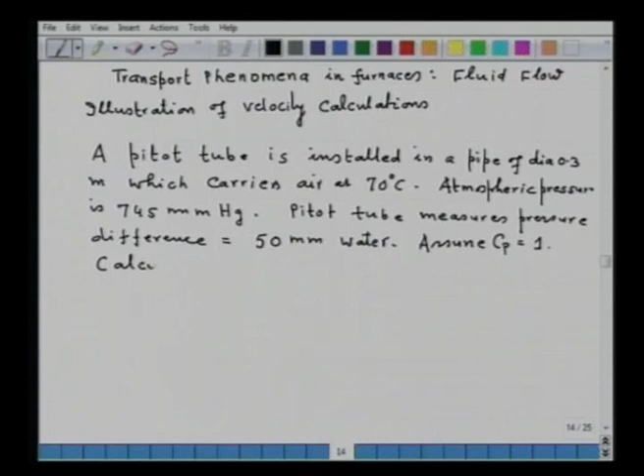Assume pitot tube coefficient, that is Cp, which we have introduced in the formula, is equal to 1. That is, it is a very well designed pitot tube. So you are required to calculate the flow rate of air passing through the pipe.

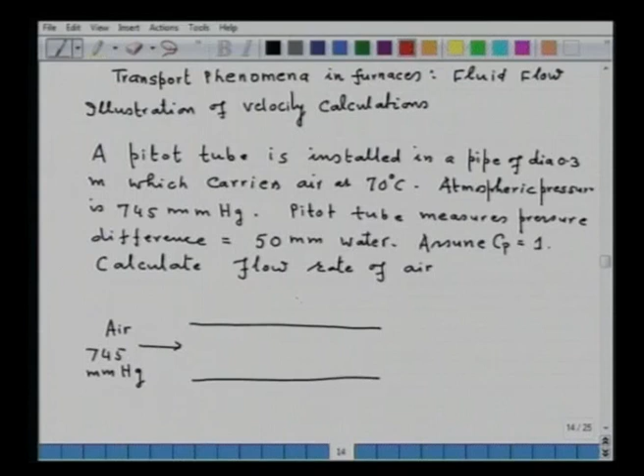Now the problem can be illustrated this way. If this is the pipe, air is flowing, and the atmospheric pressure is 745 millimeter mercury. Here there is a pitot tube placed. This is our pitot tube, placed at the center of the pipe, and it is at this position.

So the pressure difference of 50 millimeter of water, which is measured through the pitot tube, is in fact at this particular point, that is at the center of the airflow. So if the air is flowing this way, this is the flow of air, then this particular streamline will impact the pitot tube, and hence you read the pressure differential. So what pressure we are recording is the pressure at the center of the pipe.

So of course, what we will be determining from this pressure measurement will be the maximum velocity, and from there we have to calculate the flow rate of the air. So this is in fact the problem.

Now some conversion factors are also given: 1 millimeter of mercury is given to be 133.2 Newton per meter square, whereas 1 millimeter water is given as 9.806 Newton per meter square. Now these conversions you may be needing. Also, it is given viscosity of air at this temperature is 20.6 into 10 to the power minus 6 kilogram per meter per second. Now we have to solve this particular problem, and as we know from the pitot tube, that is V maximum equals Cp into square root of 2 into delta P upon rho.

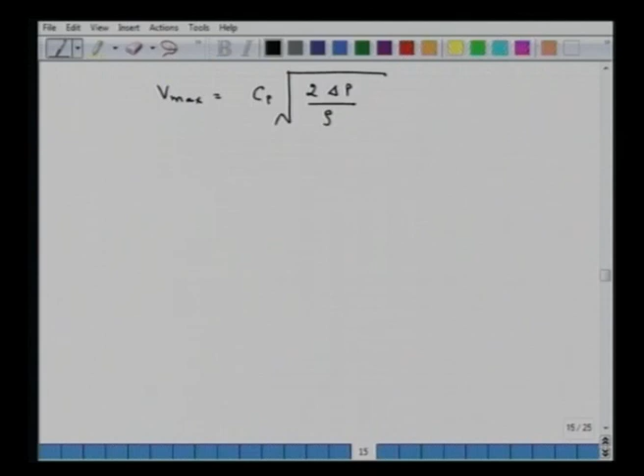So we have to calculate now the V maximum. First we will calculate V maximum, and from V maximum we will calculate the flow rate. So we have to first of all find out the density. So density rho equals P upon RT. P is 745 millimeter, so you have to convert into Newton per meter square, and the value of rho will be 1.01 kilogram per meter cube.

Now we have to convert delta P, which is given in 50 millimeter of water. So 50 into 9.806 Newton per meter square. Just multiply it, that will be 490.3 Newton per meter square.

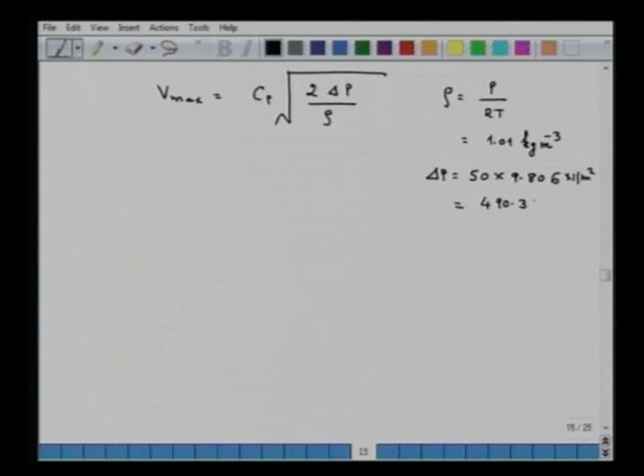Now we know all the variables in this equation. So V maximum equals square root of 2 into 490.3 upon 1.01, so that will give us 31.2 meter per second. So this illustrates how the pitot tube can be used to measure the velocity of air or fluid in the pipe or in the duct. So this is the maximum velocity at which the air is flowing.

Now if we calculate the flow rate, flow rate simply will be equal to rho u into A. So if we do all the substitutions, then we will be getting 2.20 meter cube per second.

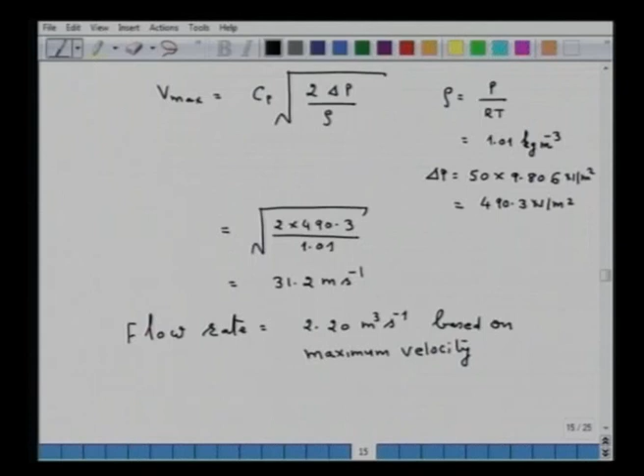Now this is based on maximum velocity. And as you recall, there is a velocity distribution in the pipe. So if you want to calculate the average air flow rate, that means you have to calculate average velocity, and this average velocity may be very close to the actual flow rate of the air rather than the flow rate that we obtained from maximum velocity. So in that particular case, what we have to do?

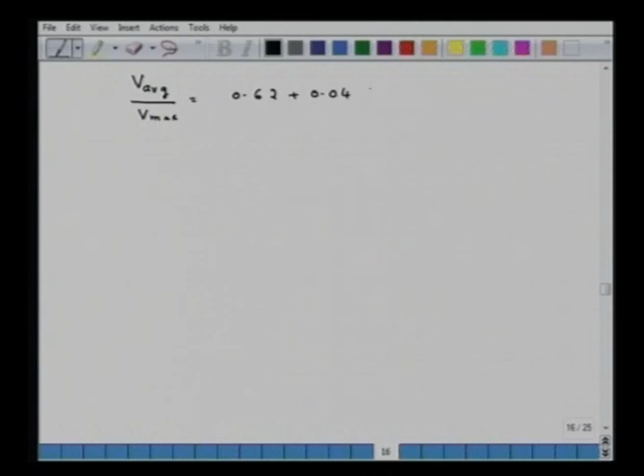We have to utilize this expression: V average upon V maximum equals 0.62 plus 0.04 log of d V maximum into rho upon mu. We know all these variables, so we can substitute and find out, and this value will come out to equal 0.83, and hence V average will equal 25.9 meter per second.

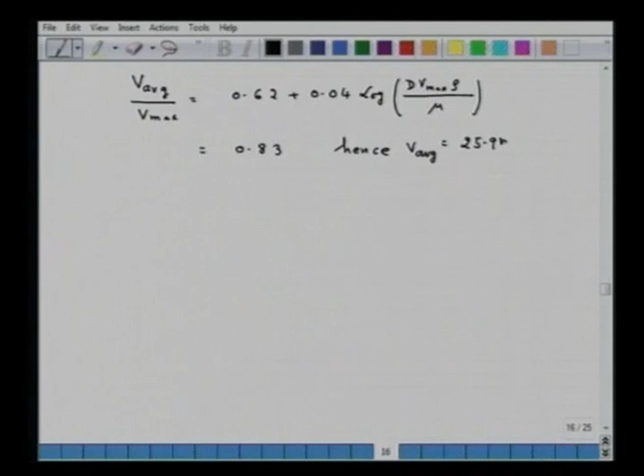Now we can determine the flow rate. The flow rate comes out to be equal to 1.83 meter cube per second, which is based on V average. So that is the difference between the flow rate when maximum velocity and average velocity are used.

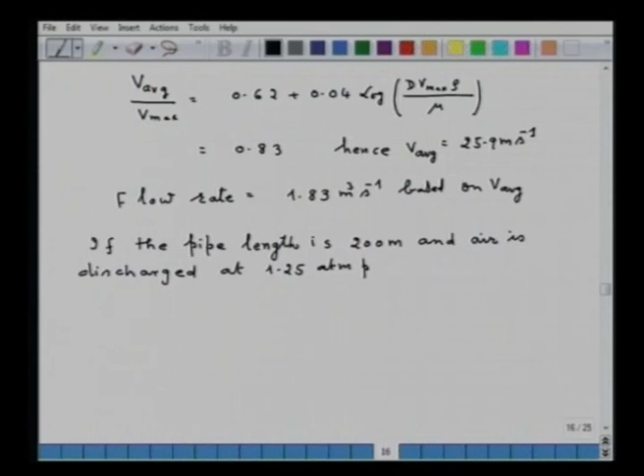Now if I want to extend this particular problem further, let us say if the pipe length is 200 meter and air is discharged at 1.25 atmosphere pressure, then calculate the power of the fan required to draw air from rest.

Atmospheric pressure is same as earlier. Atmospheric pressure is 745 millimeter mercury, that is what is given earlier.

Now, since the pipe length is involved and air is entering from rest and it is discharged at 1.25 atmospheric pressure, we have to calculate the power of the fan.

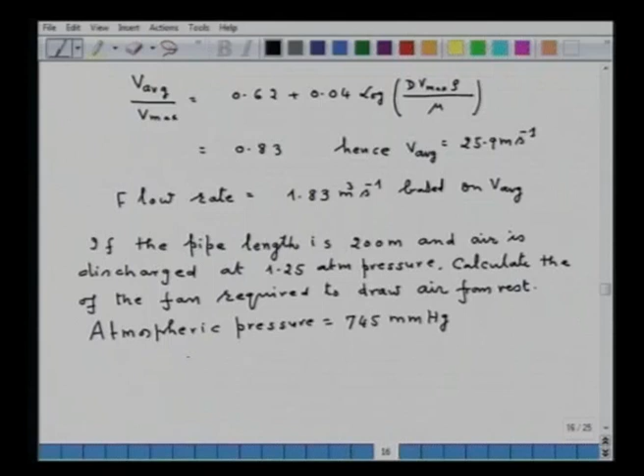If I represent again through a diagram, then it looks something like this. This is the pipe whose length is given as 200 meter. Air is drawn from rest, so somewhere here air is entering. Somewhere here I require to have a fan, of which I have to calculate the horsepower, and now I am taking the air is discharged, say at 1.25 atmosphere, which is given.

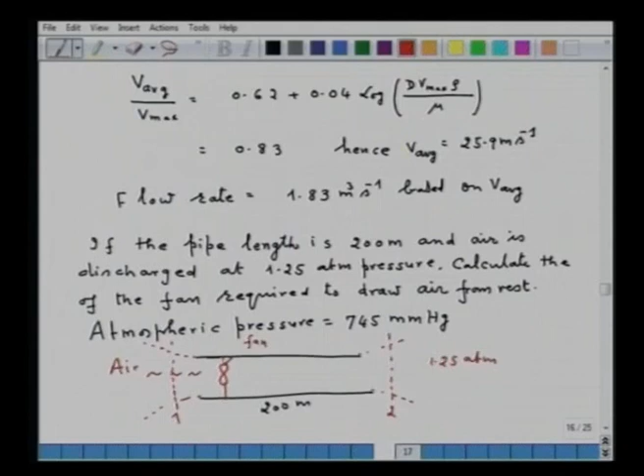So now if I want to solve this problem, what I have to do? I have to first of all take this as my section 1 and this is my plane 2. Naturally, I have to do the mechanical energy balance in order to solve this particular problem. So now what I have done here, I represented plane 1 and plane 2. Plane 1 is slightly upstream the entry of the pipe, plane 2 is slightly downstream at the exit of the pipe, meaning thereby the V1 and V2 will be very, very small and hence they can be neglected.

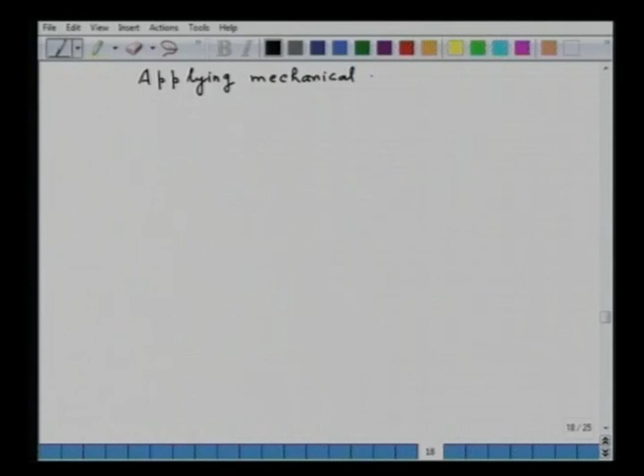So now applying mechanical energy balance between 1 and 2, then we get G delta Z plus P2 minus P1 upon rho air plus V2 bar square minus V1 bar square upon 2 minus W, plus F, that is equal to 0. F is the frictional forces.

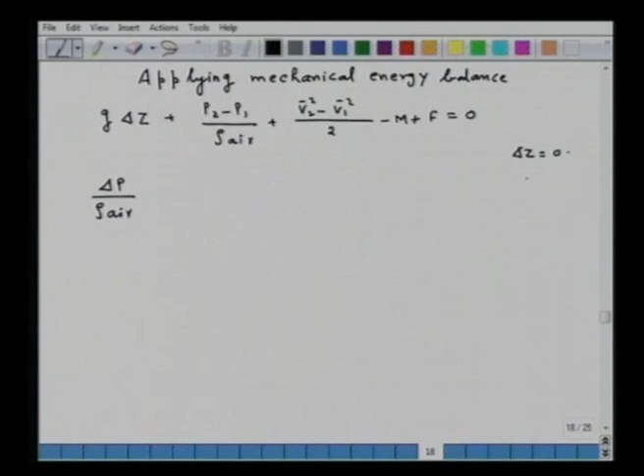Now, since it is a horizontal pipe, for horizontal pipe delta Z is equal to 0. So our equation becomes delta P upon rho air, and also V1 is equal to V2 because they are very negligibly small, we can neglect it. And F, you know this equation F, that is equal to 2F L by D V bar square plus half EF1 V bar square plus half EF2 V bar square. So all that we have to replace.

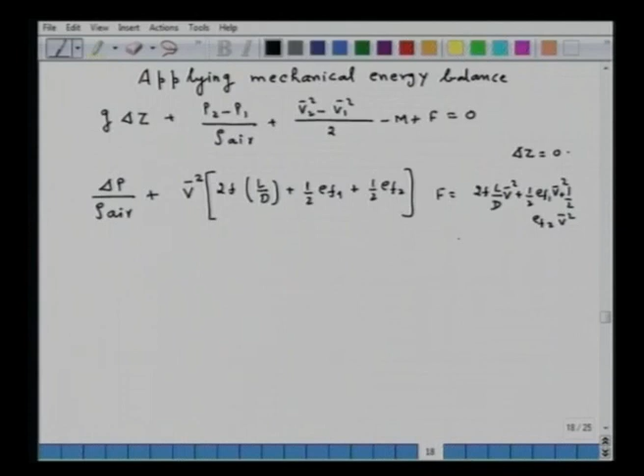So that will be equal to plus V bar square times 2F L upon D plus half EF1 plus half EF2, where EF1 is losses due to contraction

and EF2 is losses due to expansion. Now, you have noted that at the inlet of the pipe, as the fluid enters, it contracts. At the exit, the fluid expands. So accordingly, the values are given: EF1 equal to 0.4 and EF2 equal to 1.

Now, V bar is the average velocity in the pipe. However, if you wish to calculate by taking maximum, you can do that, but the correct approach would be to take the average velocity of the pipe, and as we previously determined, the average velocity was 25.9 meter per second.

So all that I have to substitute these values now into this equation, and let me just put it, this equation is a separate one. These are the values. Now say this equation is plus minus m, that is equal to 0. So what I have to do now? I have to substitute all the values, and if I do that, you can calculate the value of delta P.

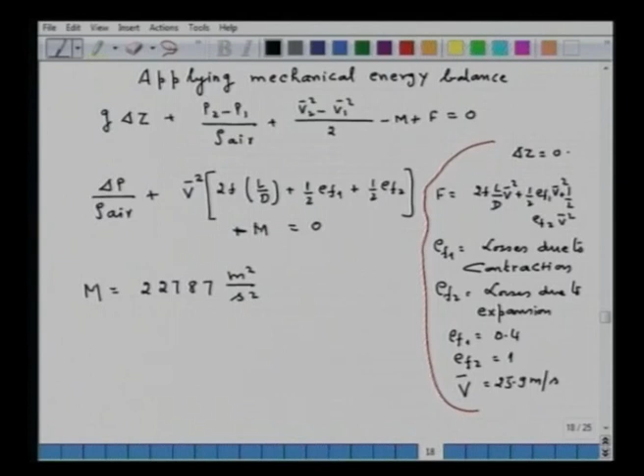Delta P will be equal to 0.25. So, if I do that, then m, which is the work done, comes equal to 22,787 meter square upon second square. You have to substitute the values: Delta P is 0.25, convert into Newton per meter square, and rho air we have already determined. Import all these values and substitute, and this is the work done.

Now, if you multiply by the amount of air, then you get the horsepower. So, the power of fan that is required is equal to 54 kilowatt or 71 horsepower. So, that will be the answer.

So, in fact, what I have illustrated is how to use the pitot tube measurement to come to the power of the fan if the need arises to do that. Otherwise, in many cases, the velocity of the fluid is important, and pitot tube can be very easily used to measure the pressure and hence calculate the velocity. It is also very easy to manufacture the pitot tube.

Now, I will give you a problem that you should solve yourself. Let us put a self assessment problem. In a duct of diameter 0.5 meter, a pitot tube is installed as shown in the figure, which I am going to draw.

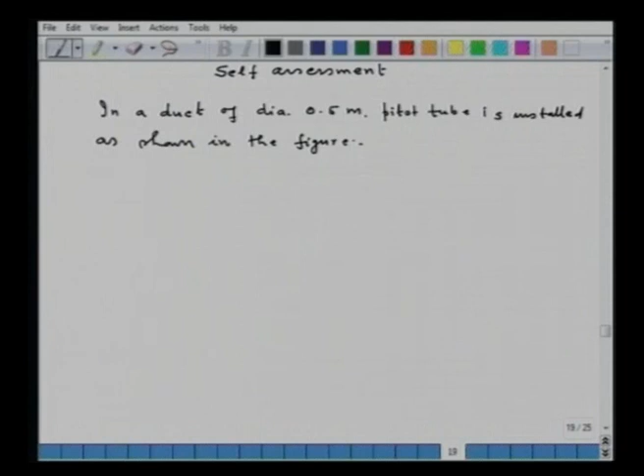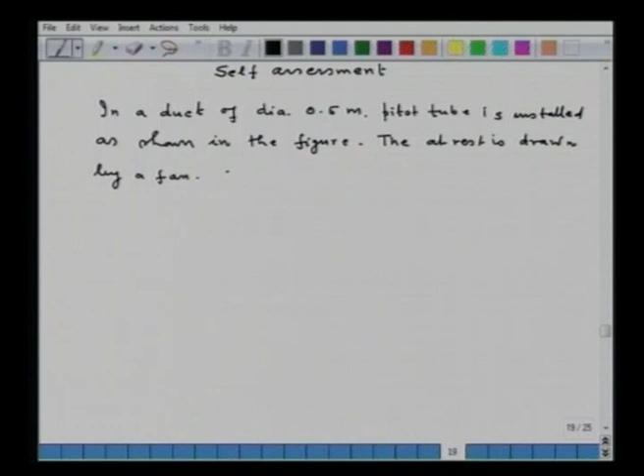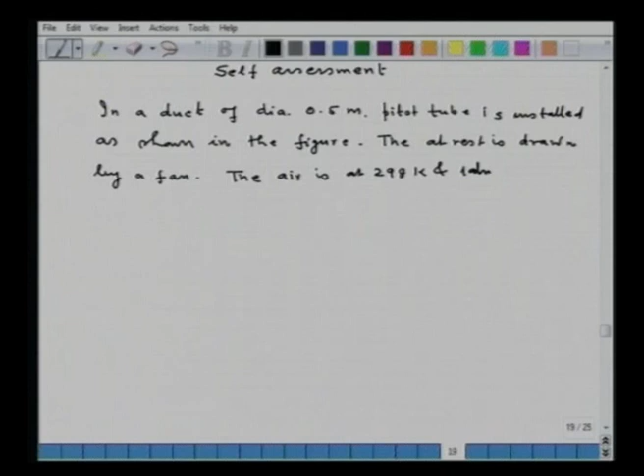The air at rest is drawn by a fan. The air is at 298 Kelvin and 1 atmospheric pressure. The air discharges at 1.15 atmospheric pressure.

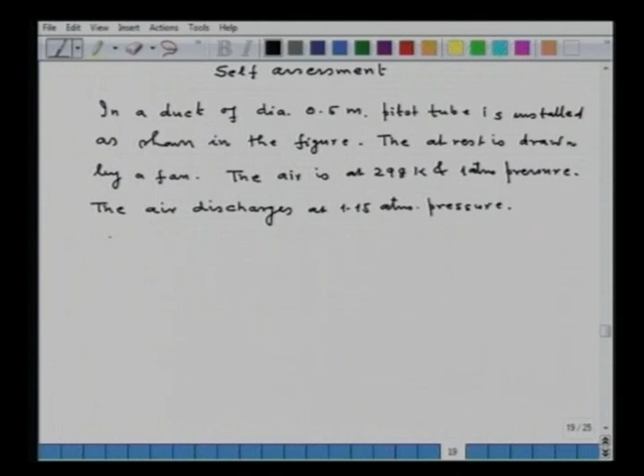If the pitot tube measures a pressure difference, say 30 millimeter water, calculate A, velocity of air, B, average velocity of air, and C, power of the fan.

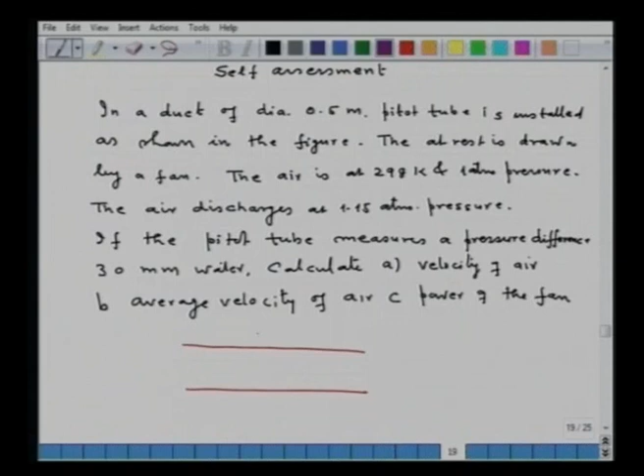Now, I will draw a figure so that you understand. This is the duct or pipe. Here I have installed a pitot tube. Air is flowing, and this is exiting. Somewhere here I have put the fan, of which I have to calculate the power required, and the duct length, which I forgot, I can give you here. The length of the duct is 160 meter.

Here some values you may be requiring. Take Cp equal to 1, EF1 take 0.4, EF2 take equal to 1, and viscosity of air take 1.85 into 10 to the power minus 5 kilogram per meter second. I do not think you require any other value, so you can calculate these values and try to understand.

Now, it is important again to refer to the plane. Somewhere you have to put your plane 1 and plane 2 — this will be plane 1 and this will be plane 2. Apply, first of all, calculate the velocity, then apply the mechanical energy balance, and so on and so forth.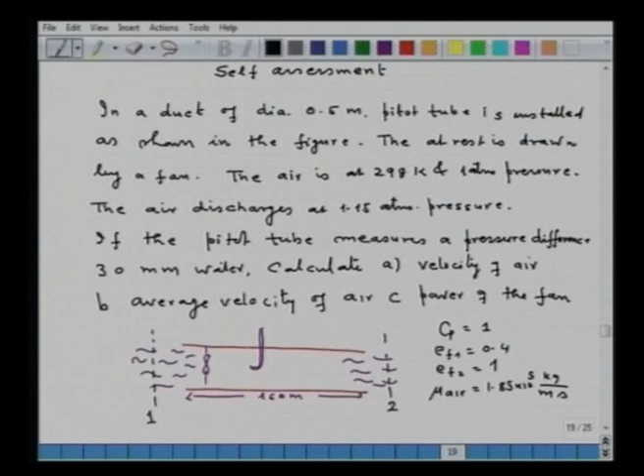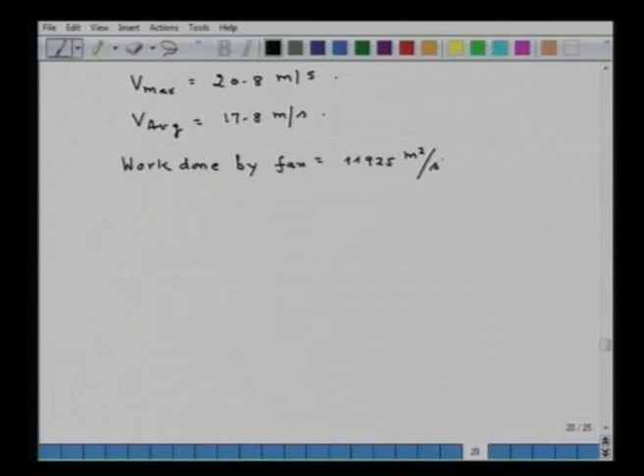V maximum will be equal to 20.8 meter per second. V average will be equal to 17.8 meter per second. And if you apply mechanical energy balance, then the work done by the fan, though it is not asked, you can also calculate, comes out to be equal to 11,925 meter square per second square, and power should come equal to 56.82 kilowatt based on V average. That is how you will be solving this particular problem.

So, with this, the illustration of velocity meter is complete, and now the next part of fluid flow measurement is that of head meters. Now, let us see head meters.

What does it mean, head meter? A head meter is used to measure the pressure differential. It can be installed in a pipe, in a duct, or in a flue, and one can measure the pressure differential and correlate it with the flow rate.

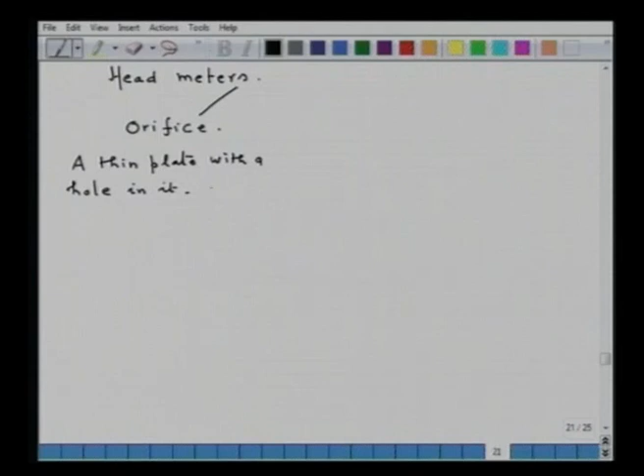So, there are different types of head meters used. One head meter is called orifice. An orifice is a thin plate with a hole in it, and it is placed across the flow.

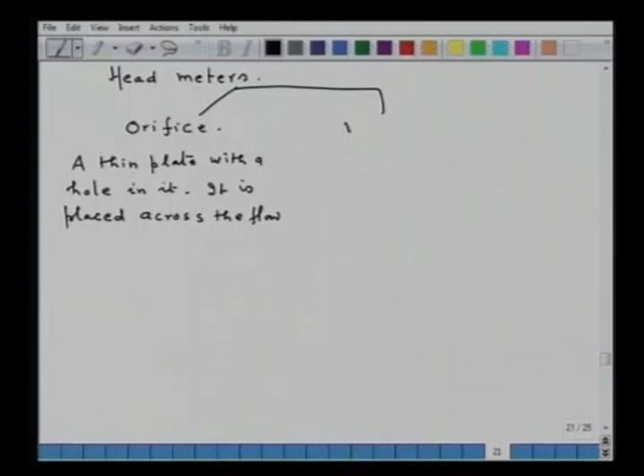Another head meter is called Venturi meter. Now, Venturi meter has to be designed. In the Venturi meter, the flow area decreases in the direction of the flow, attains a minimum value which is called the throat of the Venturi, and then again increases in the direction of the flow. So, in a way, a Venturi is frictionless, ideally speaking.

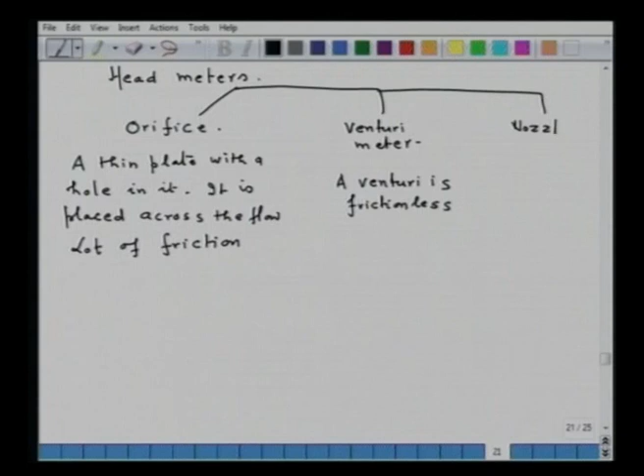The third type of head meter is the nozzle. Nozzles are characterized in that the cross sectional area decreases in the direction of flow and attains the minimum value at the exit, which is called the throat of the nozzle. So, it also has friction, but somewhere in between Venturi meter and orifice.

So, an orifice looks, for example, say this is the pipe. I just take a plate, and if this is the center line, then an orifice — the plate over here has some hole. So, this is the orifice.

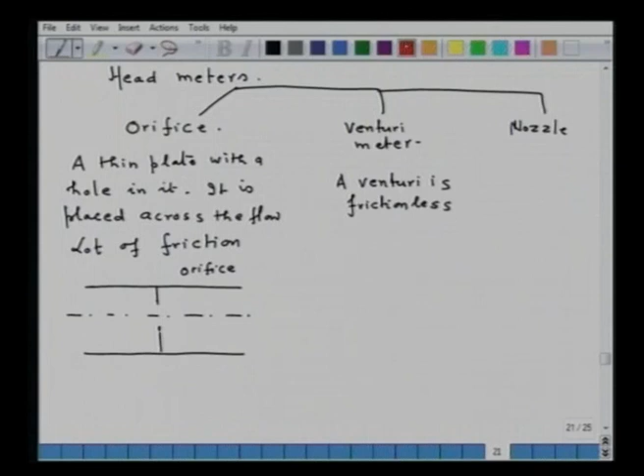So, this is the orifice, and if you want to represent the flow lines, that is how the air will flow, and this is the flow direction of air. So, air will go this way, and how the air flows.

At this point, a lot of eddies are generated, and because of these eddies, there is a loss of pressure. So, this is typically how the flow of air through an orifice looks, and other flow lines can also be shown, that is how the orifice works.

Now, if I draw a venturi, let me draw a center line. The flow cross section area for the flow decreases, attains a minimum value, and then further increases in the direction of the flow. So, here the flow line, suppose the air is flowing this way, then it will flow this way. This is the flow of air.

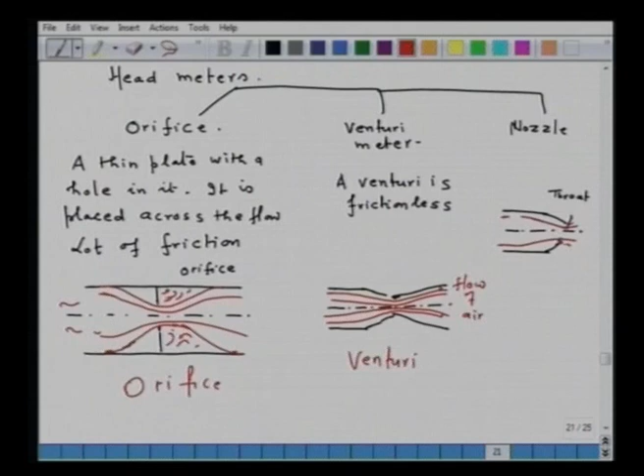So, now let us see how we can measure the pressure differential. Whether I take an orifice, a venturi, or a nozzle, the pressure measuring device will be the same. The only difference will be that of the discharge coefficient. So, let us take the orifice first, for example.

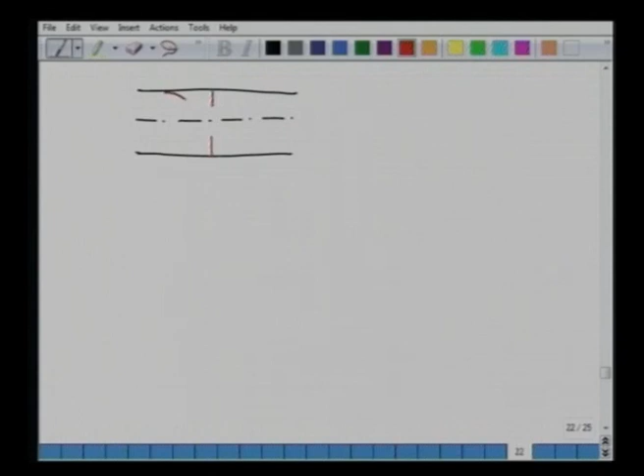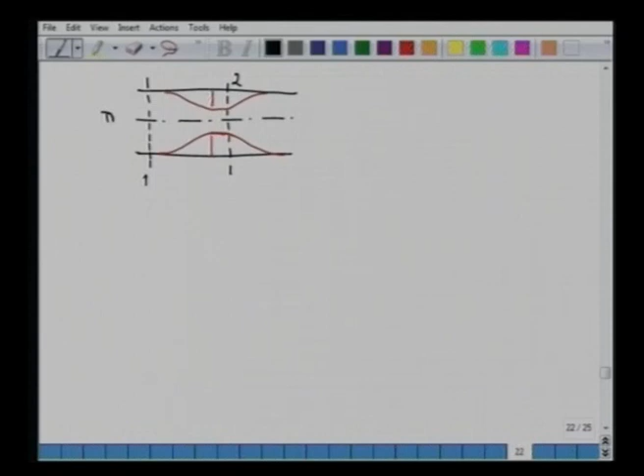So, I represent the orifice, this is the central line, and this is the pipe. Here I am putting an orifice, that is a simple cross section area. So, the air flow will go this way. Let me represent this as section 1, and this one as section 2. This is at the entry, D1 is the diameter of the pipe, and D0, from here to here, D0 is the diameter of the orifice.

Now, we have to find out and correlate pressure difference with the velocity and also with the flow rate of the air. So, what we have done is we have selected section 1 and section 2. Now, we attach a pressure differential device, that is a manometer, somewhere here between these sections. This is the manometer, and we will be reading this pressure difference.

Delta P. Now note, in order to measure the maximum pressure difference, we have to locate section 2 such that the measurement gives you maximum pressure. Logically, when we have the diameter of the pipe as D1 and diameter of the orifice as D0, then naturally D0 is less than D1. So, logically, our second leg of the manometer should be at D0.

But when a fluid flows through an orifice, the flow line contracts, and on account of this contraction, a minimum cross sectional area for the flow results downstream of the orifice. With that I mean, though the minimum cross sectional area should have been at the point D0, the diameter of the orifice, because of the dynamics of the flow, the minimum cross sectional area point shifts downstream of the orifice, and this one, which has somewhat less diameter, I will call D2.

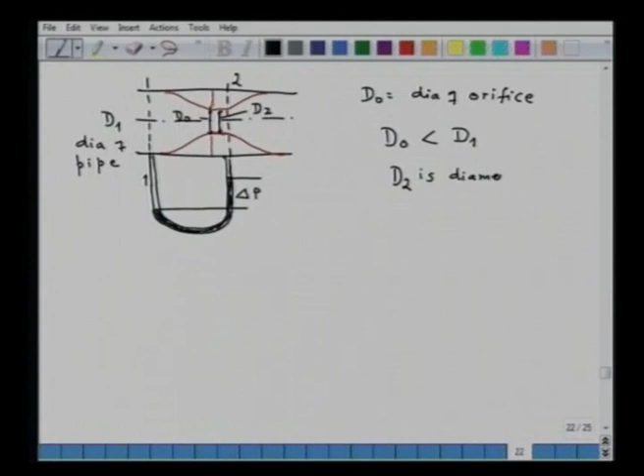So, that means this diameter is D2, this diameter is D0. So, D2 is the diameter at which the minimum cross sectional area results, at which the minimum cross sectional area is there.

This D2 is called the formation of vena contracta, and as such, the vena contracta is the formation of minimum cross section in the flow downstream the orifice. This is typical for the orifice, because when you locate the second leg of the manometer at the orifice, you will not be reading the maximum pressure, you will be reading maximum pressure downstream the orifice. So that is the most important point in case of orifice: the formation of vena contracta, the minimum cross section somewhere downstream the orifice. It is at that vena contracta we have to put the second leg to measure the maximum pressure differential.

Mind you, this is a dynamic thing. It is very difficult to locate the vena contracta when the fluid flows from inlet to exit. All that we know is the static diameter at the inlet and diameter of the orifice. So that point is to be kept in mind.

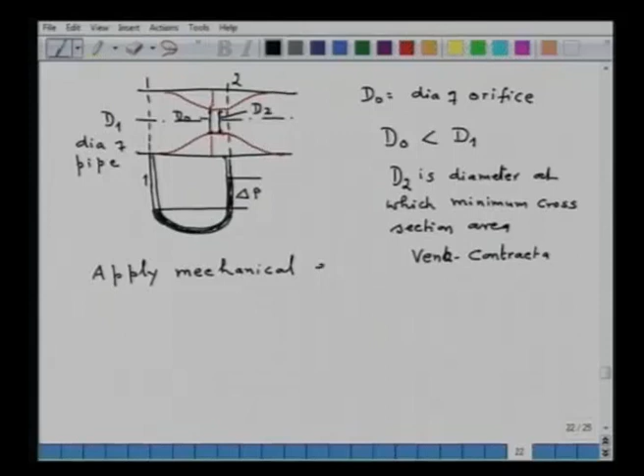Now say we apply mechanical energy balance at points 1 and 2. It is horizontal, so delta z equal to 0. There is no fan, so W is also equal to 0, and for the time being we are assuming that frictional forces, that is F, are also equal to 0, though we know there is friction and a loss of pressure that we will take into account some other way. If we apply this balance, then we get P2 minus P1 upon rho plus V2 bar square by 2 minus V1 bar square by 2, that is equal to 0.

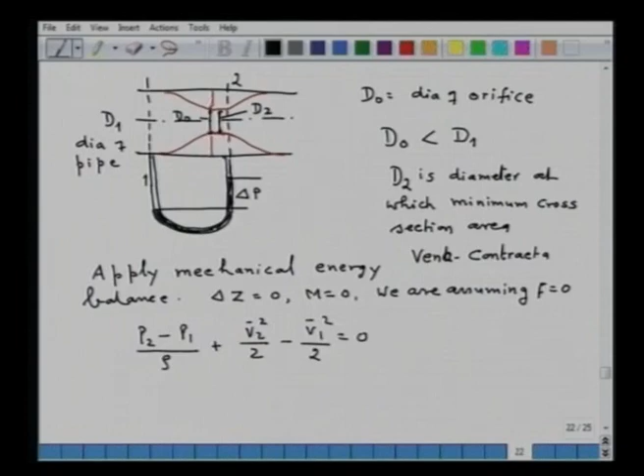Now remember, our points 1 and 2: 1 is at the inlet and 2 is at the vena contracta, not at the orifice diameter. Note this particular point is important.

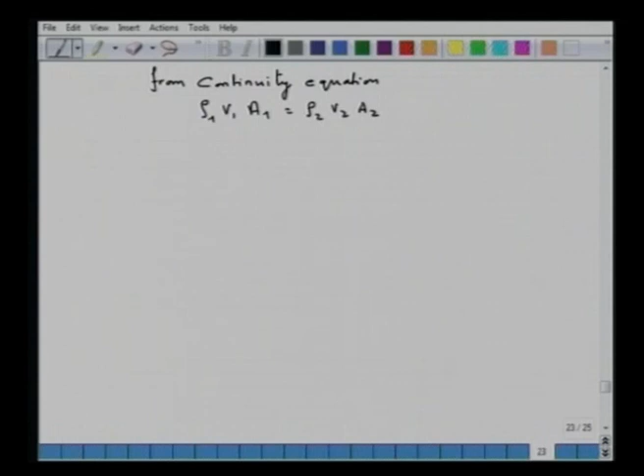Now, say from the continuity equation, we know that rho 1 V1 A1 equals rho 2 V2 A2. Since the fluid is incompressible, rho 1 equals rho 2. So we get a very simple relationship: V1 bar, or let me put average velocity, V1 bar, that will be equal to D2 upon D1 squared into V2 bar.

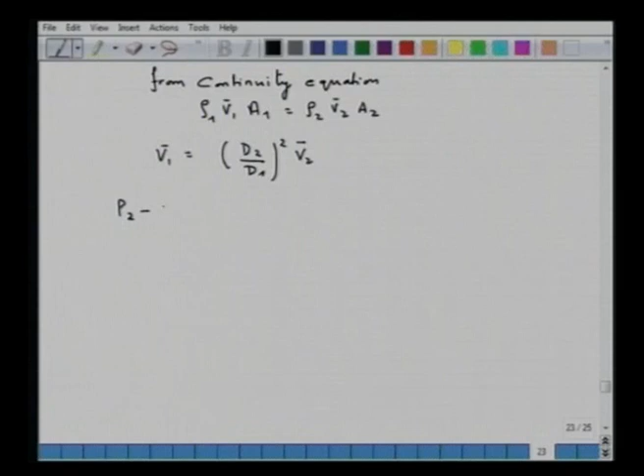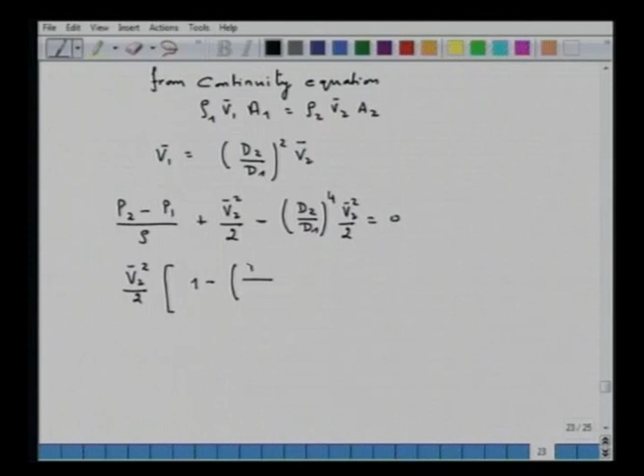Now we insert this expression into our mechanical energy balance and simplify it. Then we get P2 minus P1 upon rho plus V2 bar square by 2 minus (d2 upon d1) to the power 4 into V2 bar square upon 2, that should be equal to 0. If I simplify this, I get V2 bar square by 2 times [1 minus (d2 upon d1) raised to the power 4], that is equal to P1 minus P2 upon rho.

So simplifying further, I get V2 bar equals the square root of [2 into (P1 minus P2) upon rho], divided by [1 minus (d2 upon d1) to the power 4], and that is the closure of this expression.

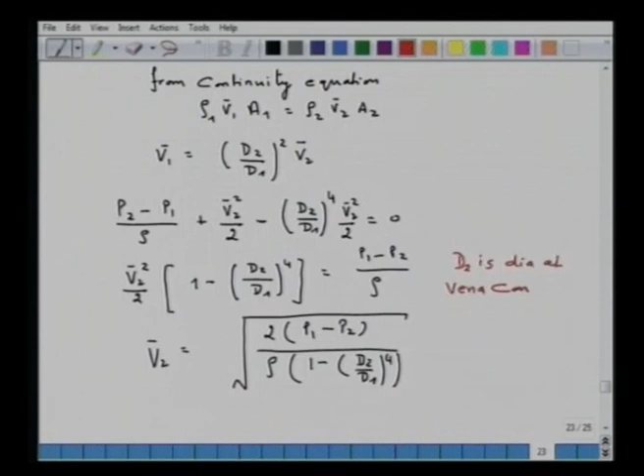Now remember, I again stress and write with a different ink, that d2 is the diameter at vena contracta. This is important, because only then will you measure the maximum pressure differential. We note and we know and we have done this: we have positioned the second leg of the manometer at the vena contracta.

It is very difficult to determine in practice. So in fact, we have to use a sort of coefficient of discharge in our calculation, which accounts for the losses and geometrical configuration. In other words, the shifting of the minimum cross sectional area downstream the orifice will lead to the maximum pressure.

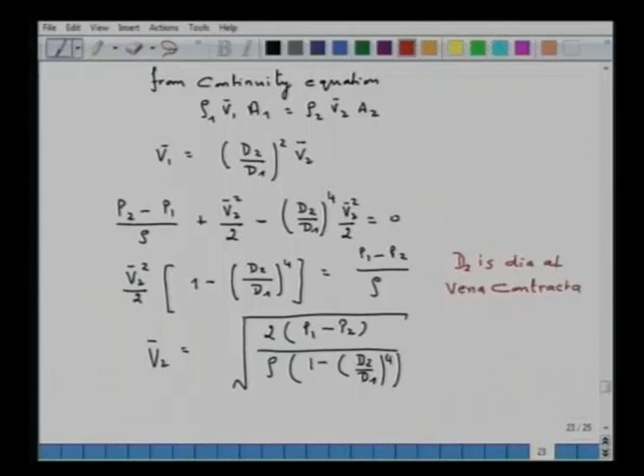But then we only know diameter d1 and d0. We do not know d2. d2 is dynamic - if the flow rate is very high or very low, the vena contracta will shift and you will not be able to locate it, and you will not be able to do anything. So in order to use this expression for V2 bar in terms of known parameters, what we will do is relate it to the so-called diameter at the inlet and diameter of the orifice.

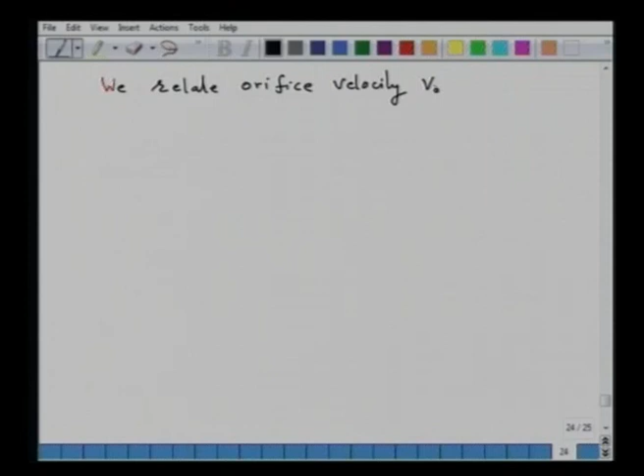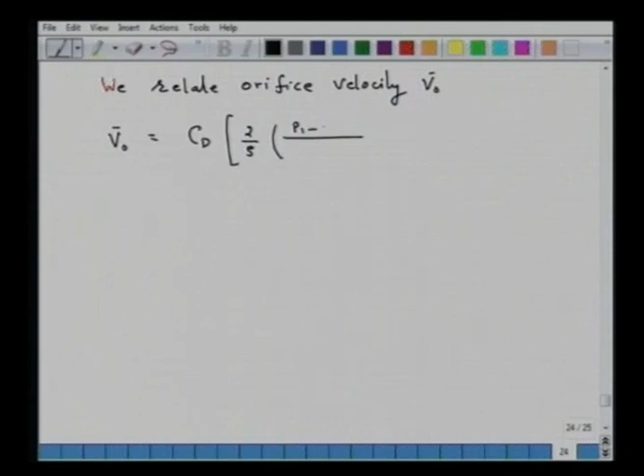So we relate the so-called orifice velocity, V0 bar. We write V0 bar equals CD times the square root of [2 upon rho times (P1 minus P2) upon (1 minus beta to the power 4)], raised to the power 1 by half, where beta equals d0 upon d1, and CD is the coefficient of discharge.

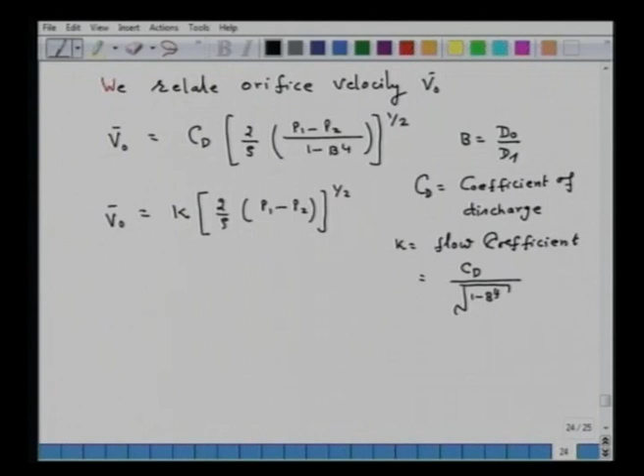Now if you want to, we have incompressible fluid and compressible fluid. Say for incompressible, density is constant.

So we can determine the mass flow rate of fluid: m equals rho, velocity V0 bar into A. We can substitute all these values and get K into A0, where A0 corresponds to the area at the orifice, times square root of 2 rho times P1 minus P2. That is for incompressible fluid.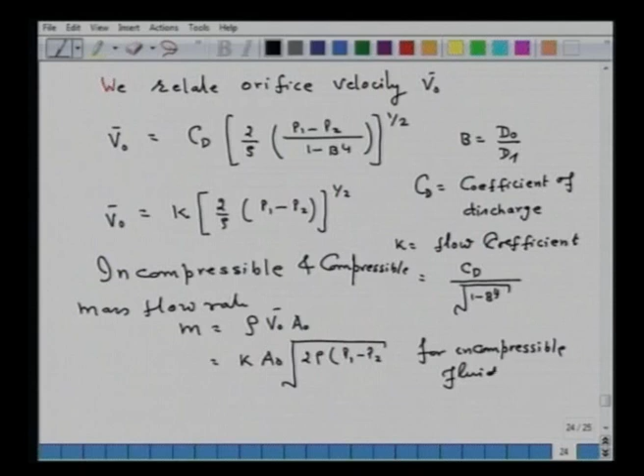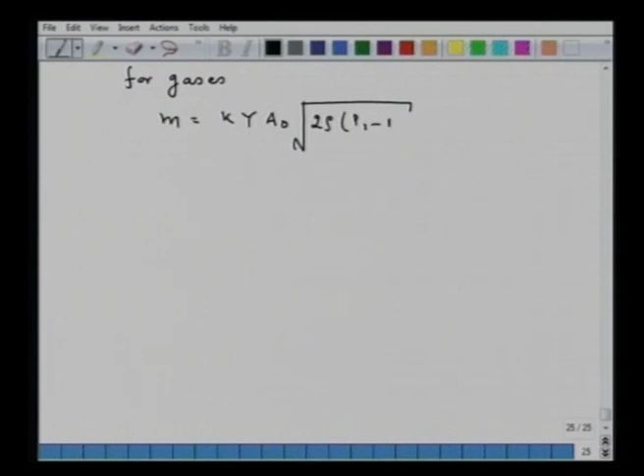For incompressible fluid. Now for gases, this mass flow rate of air, m, will be equal to K y A0 square root of 2 rho P1 minus P2, where y is an additional factor called the expansion factor.

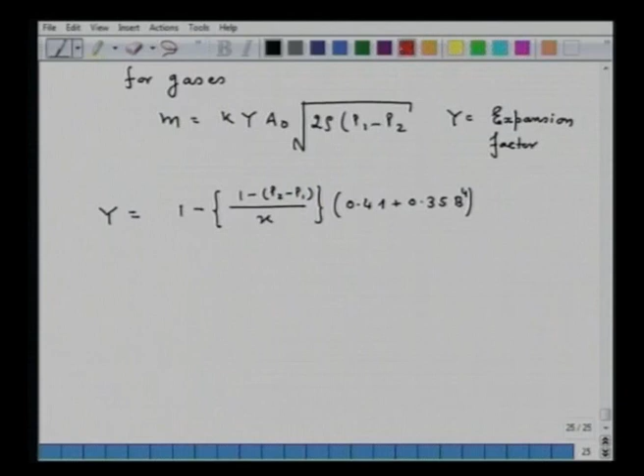This y can be determined by: y equals 1 minus, P2 minus P1 upon kappa, times 0.41 plus 0.35 times B to the power 4. This expression holds for orifice and square edged. From this equation you can calculate y.

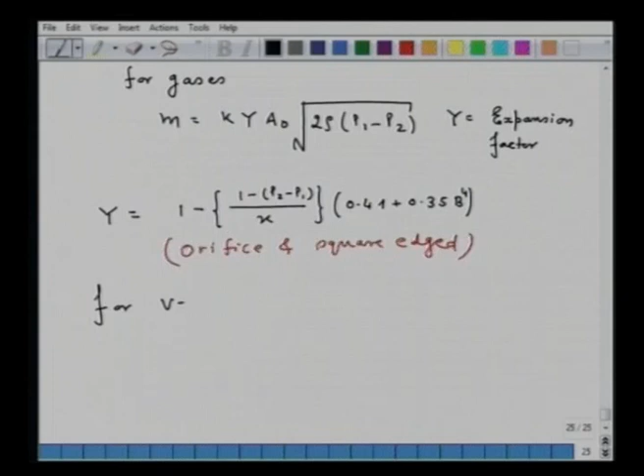Now the other head meters, which are Venturi and nozzle, a similar expression is valid: m equals K y A0 square root of 2 rho P1 minus P2. So for Venturi and nozzle, the expression m equals K y A0 square root of 2 rho P1 minus P2 is valid.

The same, only here A0 will be equal to the cross sectional area of the throat. This is the minimum cross section area, because in case of Venturi and nozzle, formation of vena contracta is not there. So the minimum cross section, which is at the throat, can be used to determine the value of A0.

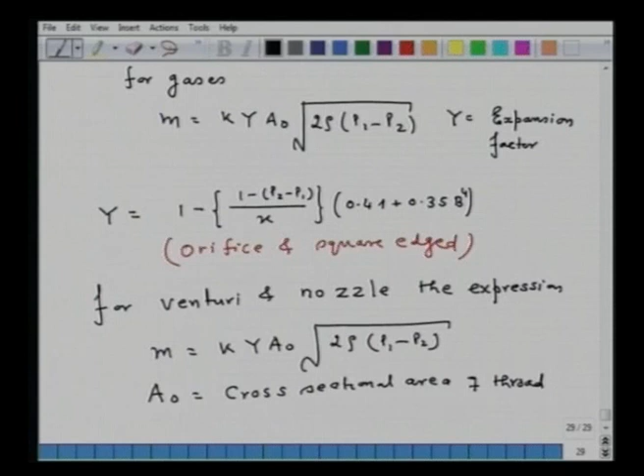Now the difference would be here: you have to find out how to determine y. For compressible fluid, you have to find the value of y, and this is for Venturi. Now we have to determine the expansion factor y for Venturi and nozzle.

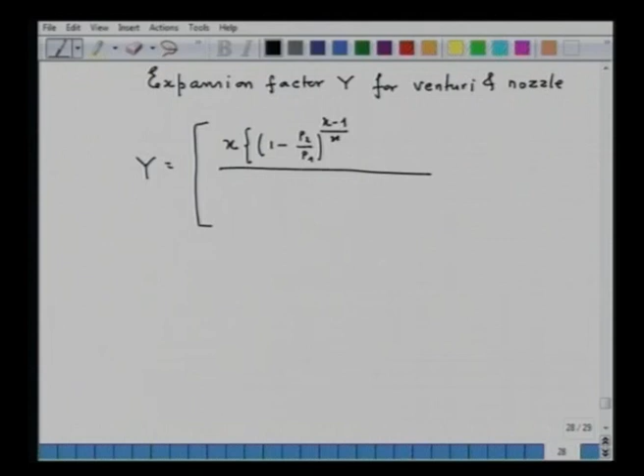It can be determined by the following expression: y equals kappa times (1 minus P2 upon P1 raised to the power kappa minus 1 upon kappa), times (1 minus B to the power 4), divided by (kappa minus 1) times (1 minus P2 upon P1), times (P2 upon P1 raised to the power minus 2 upon kappa minus B to the power 4), and the whole raised to the power 1 by 2.

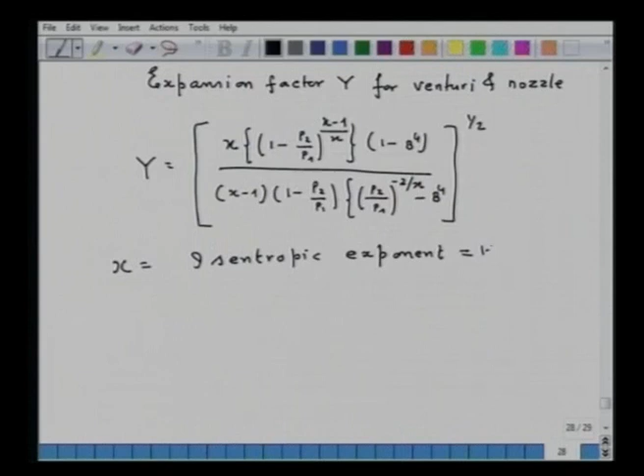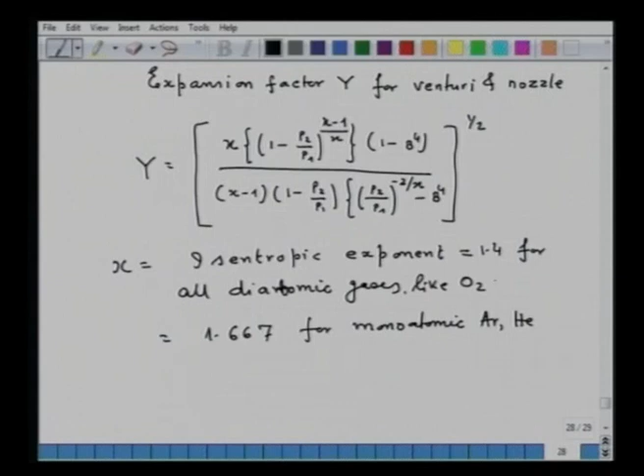Here kappa is an isentropic exponent, and this is equal to 1.4 for all diatomic gases, and kappa is 1.667 for monoatomic gases like argon and helium. For gases like O2, N2, air, this is what applies.

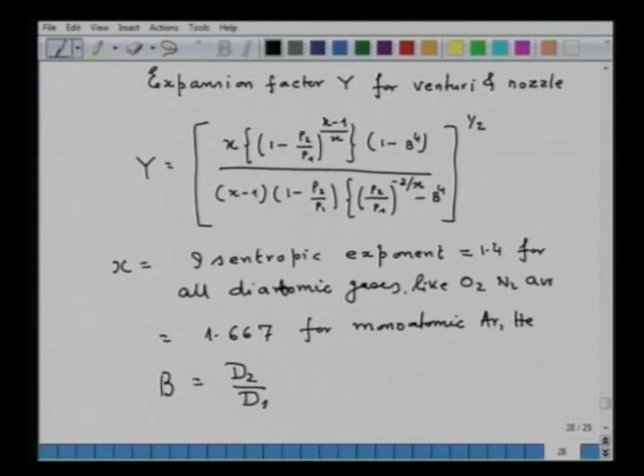So you can determine y, and the rest B we have already determined. Now B in case of Venturi and nozzle will be equal to D2 upon D1, where D2 is the diameter at the throat and D1 is the diameter of the pipe. P2 and P1 are the pressures at the respective locations.

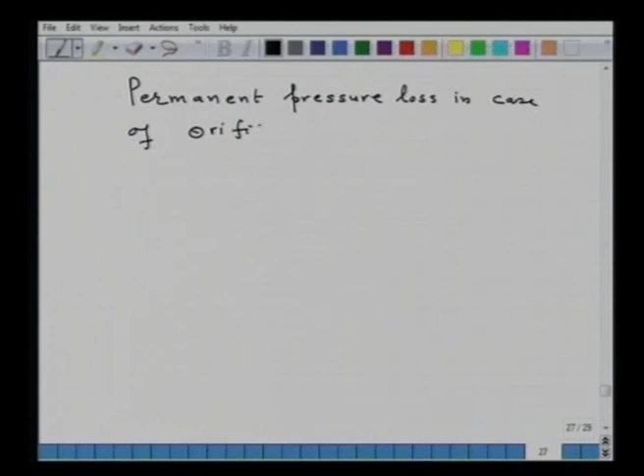We also note that orifice plates also cause a loss in pressure. That means use of an orifice will also lead to permanent loss of pressure. If the fluid flow is frictionless, there will be no loss. So the permanent pressure loss in case of orifice can be calculated as delta P loss equals 1 minus B square into P1 minus P2.

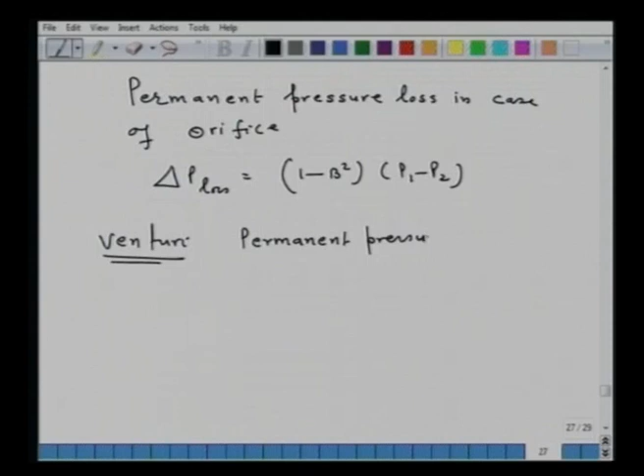Whereas for Venturi, they are almost frictionless, so their permanent pressure drop is equal to 10% of the measured differential pressure.

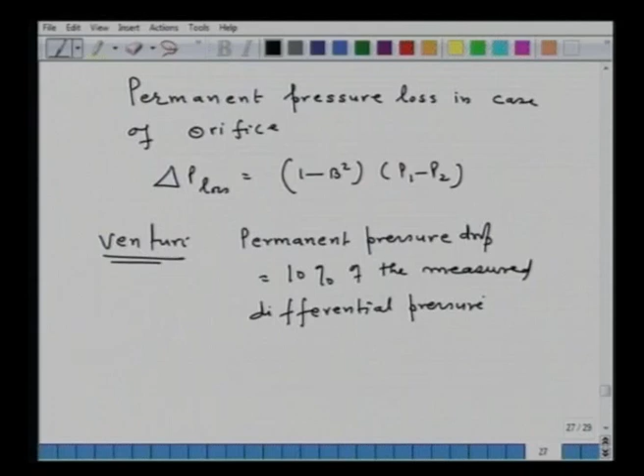Now with this we have derived the equation to calculate the velocity, and in the next lecture I will illustrate the use of this expression to determine the values for Venturi and orifice.